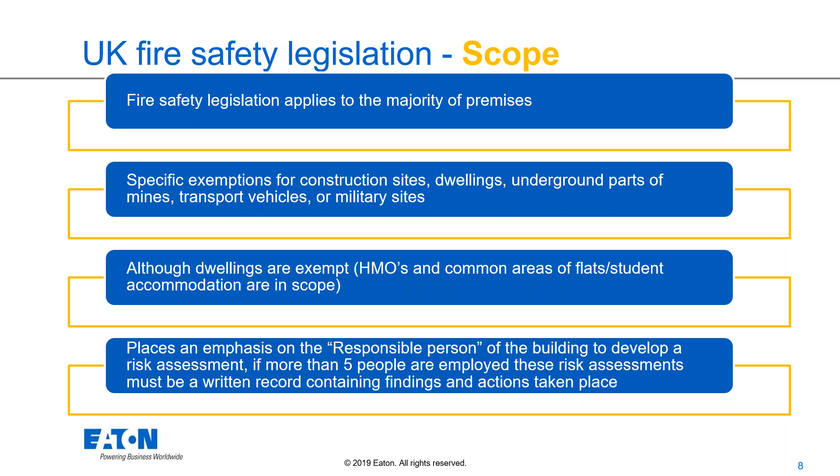To carry out those risk assessments - again, duty holder in Scotland and appropriate person in Northern Ireland - they're normally the employer or the building owner, but in some circumstances there can be more than one person who has an influence over the fire safety of a premises. That's particularly relevant in sort of lend-lease applications where you may have more than one responsible person. And again, there's a need to carry out a fire risk assessment, produce policy, develop procedures, and produce staff training and fire drills, provide safe means of escape, escape signage and sufficient emergency lighting, and they can use competent engineers to provide that service if required.

Now, a competent person - so if not trained themselves, the responsible person for that building must appoint or contract a competent person on their behalf to carry out a risk assessment. Now, just in terms of some of the breaches, and just to give you an idea of really what happens when it all goes wrong in the UK.

So these are fines and prison sentences for breaches of the regulatory reform order. Now, these specific examples do mention the lack of emergency lighting. There are many more examples on Google which may or may not include emergency lighting breaches. But to give you an idea, the fines are now unlimited.

There previously was a limit. In 2010, there was a £400,000 fine for a prominent fashion retailer, and you'll be able to find them on Google. In 2013, student accommodation was fined £150,000.

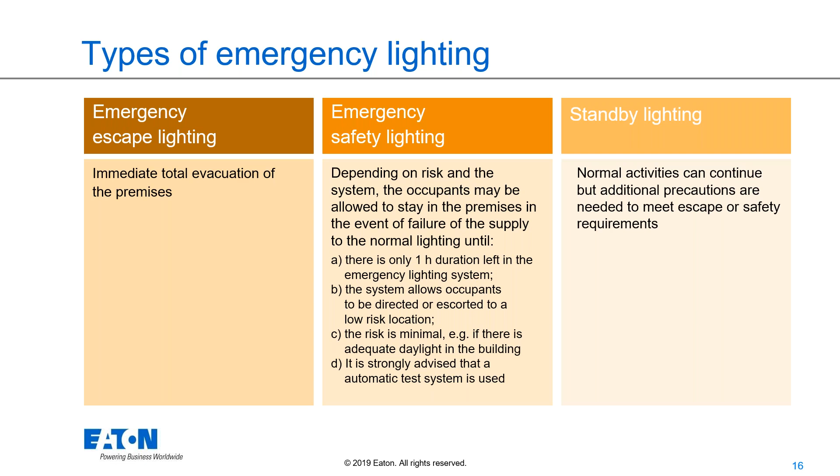Now, the last column on the right-hand side, that's standby lighting. I don't touch too much on it in the CPD because it tends to cover things like essential and non-essential supplies and multiple levels of redundancy. Think of something like a hospital where you provide lighting where normal activities can continue, but indeed maybe additional precautions are needed to meet escape and safety requirements. So I don't tend to cover that too much.

So if you are familiar with the previous version of BS 5266-1, which was in 2011, some of the main revisions are endorsing a change to a single exit sign format, which we'll pick up later. The scope now includes safety lighting, which we've just talked around.

There used to be a deviation within the UK that allowed a very low light level of 0.2 lux upon escape routes if you could prove that escape route was permanently unobstructed. That has now been removed, and minimum levels should be 1 lux at all times, but we'll touch upon that in a moment. There's some recommendations for specific risk applications, a clause around external emergency lighting, and some clauses around existing installations which may not comply with current standards and how to potentially rectify that.

So 5266 provides a diagram to assist designers, and I like to start off on this page as it just gives a nice overview which we'll build upon. This diagram shows areas which require emergency lighting.

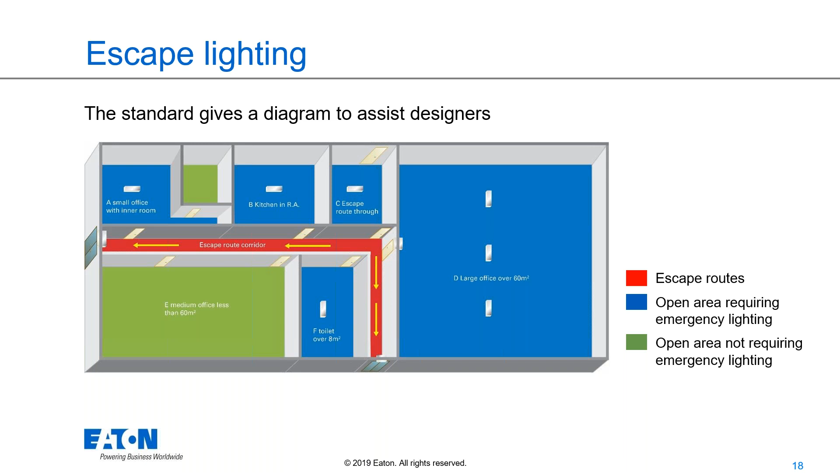Blue areas are open areas, also known as anti-panic areas, where a 0.5 lux emergency lighting level is required, which is any spaces over 60 meters squared, any toilets over 8 meters squared, or any areas identified as having an escape route passing through them, or identified in the risk assessment. Any red areas on that diagram is the escape route corridor that requires 1 lux minimum, and any areas in green potentially may not require emergency lighting. So spaces under 60 meters squared which are not a toilet, and generally there's no perceptible risk within those areas, so they're not identified within the risk assessment.

Based on that diagram, we'll now build that knowledge up around emergency illumination and application requirements. As I mentioned earlier, open area or anti-panic lighting is provided to avoid panic and provide illumination, allowing people to reach an escape route. That's generally identified as a space above 60 meters squared, or if an escape route passes through it, and any toilets above 8 meters squared, or any toilet for ambulant use, or identified by a risk assessment. The requirements are 0.5 lux, with a 0.5 meter outer boundary excluded, and a diversity ratio of 40:1, which is a maximum minimum ratio.

So if you hit 0.5 lux as a minimum, your maximum illumination in that room should be 20 lux, and that allows people to escape without the eye essentially responding to a high peak and a very low minimum.

Each compartment requires 2 sources of illumination, and a compartment is any open area or escape route requiring emergency lighting. There is a note that glazing panels in doors that allow suitable illumination from an adjacent location may be acceptable to form part of that 2 sources of illumination.

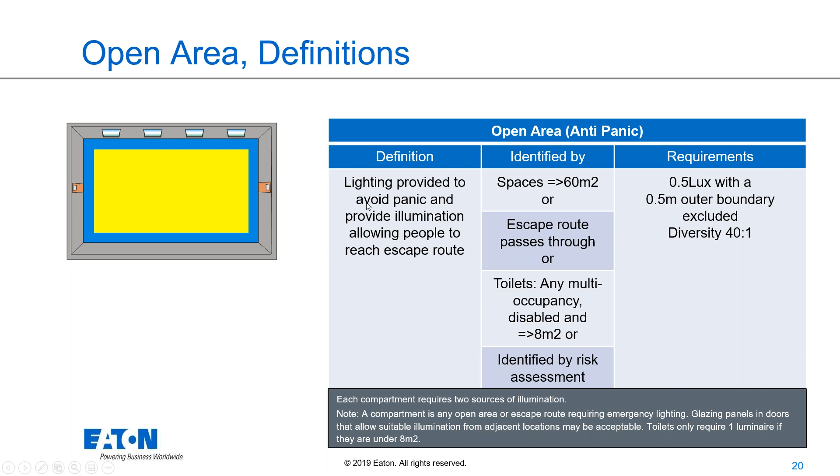So I like to touch upon spacing tables. I think spacing tables are great because they provide a very quick and easy method to identify how many emergency luminaires you need within a space, and the majority of products have spacing tables available.

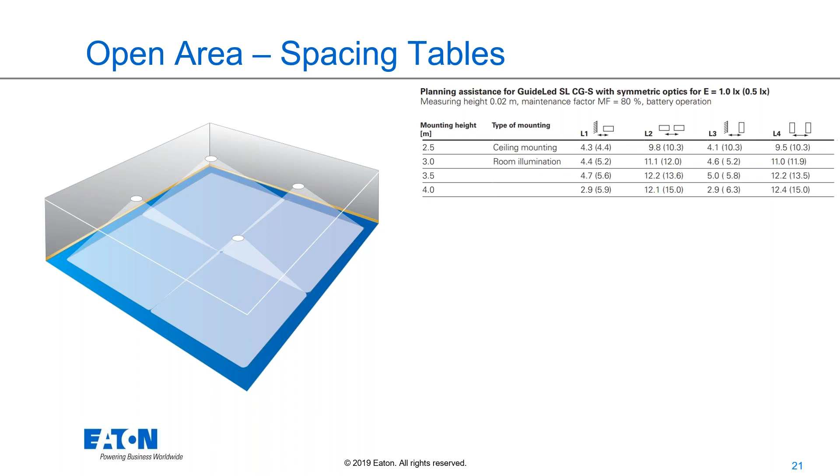So this is one of our products, a GuideLed SL, but essentially you select the correct optic. In this particular instance, it's a symmetric optic, which means it's symmetrical in both directions, and you select the illuminance that you require. For open areas, you require 0.5 lux. Then you read the mounting height. In this particular example, I believe I've chosen 3 meters as a mounting height.

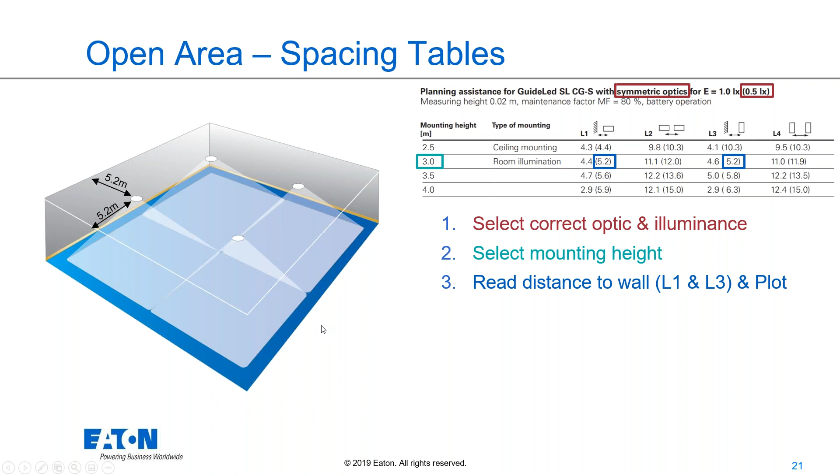And then you read the distance to the wall, which is L1 and L3. They're in brackets because of that 0.5 lux, and you plot that on a drawing, 5.2 meters from the wall to the first fitting, and then you read the distance between the luminaires, which is 12 meters, just shy of 12 meters, 11.9, and you can plot that on a drawing.

Now you can plot that up for any sort of square area. You're able to immediately calculate the amount of luminaires in the room and plot that on the drawing, and then quantify how many emergency luminaires you require for that 0.5 lux in that open area. So I do believe they're quite powerful tools, and you can repeat the spacing until the area is complete.

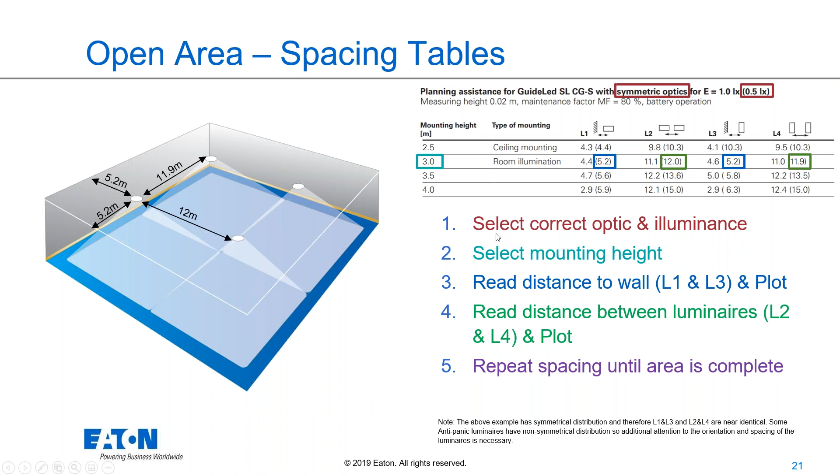Just a small note on that: that has symmetrical distribution, so the figures are very similar between the two directions of the luminaire. If you have a luminaire at 0 degrees or 90 degrees, it's very similar. Just be aware if you have asymmetric distributions, you might have a linear product — they may be different in different directions.

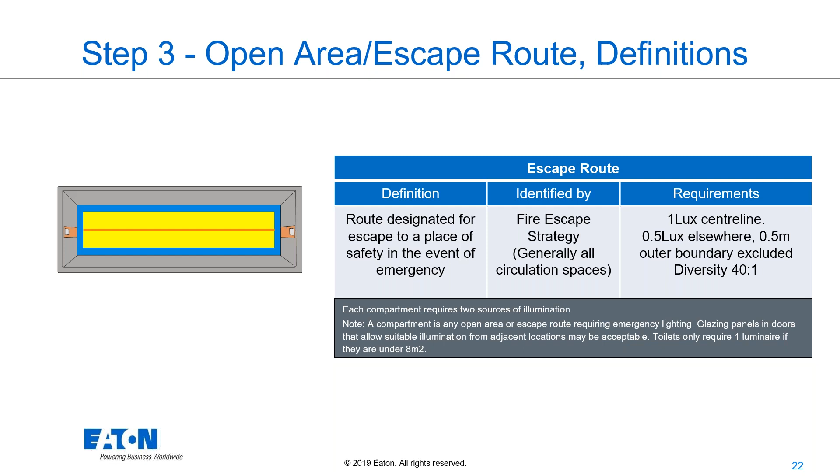So we'll have a look at open areas. Escape route definition: an escape route is a route designated for escape to a place of safety in the event of emergency. It's generally identified by the fire escape strategy, but generally all circulation spaces are escape routes. The requirements are 1 lux down the center line and 0.5 lux elsewhere over that escape route, with a 0.5 outer boundary excluded. Again, diversity ratio applies, and again the two sources of illumination requirement applies.

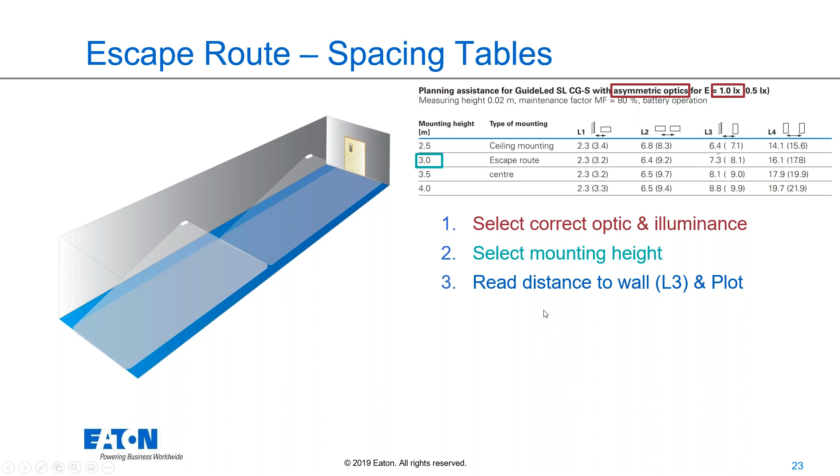And again, a very similar story in terms of escape route spacing tables. You select an asymmetric product, which provides 1 lux down an escape route, and you do the same again: select the mounting height, read the distance to the wall — 7.3 from the wall to the first fitting — and then read the distance between the luminaires, 16.1.

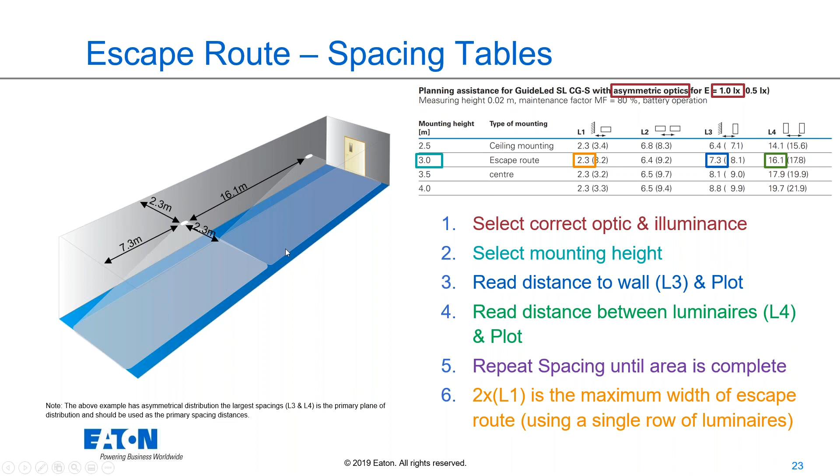Repeat the spacing until the corridor is complete. Two times the L1 distance, which is the distance from the luminaire to the wall in the other direction, is the maximum width of the escape route. So these are very useful spacing tables for calculating open and escape route spacing and allowing you to plot emergency luminaires.

That's the requirements for open areas and escape routes. Now, 5266 calls for luminaires specifically sited at locations, which will be on the following slides. For these examples, near is defined as within 2 meters horizontally, and at means that the emergency luminaire would illuminate in both directions. I'll explain that as I run through the slides.

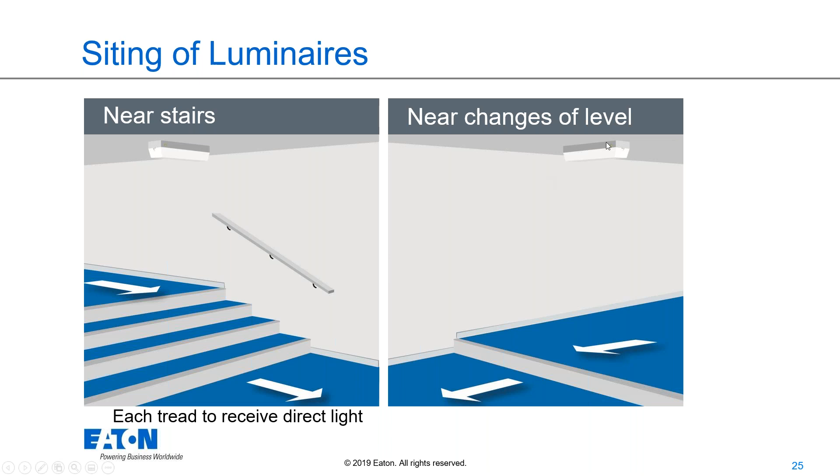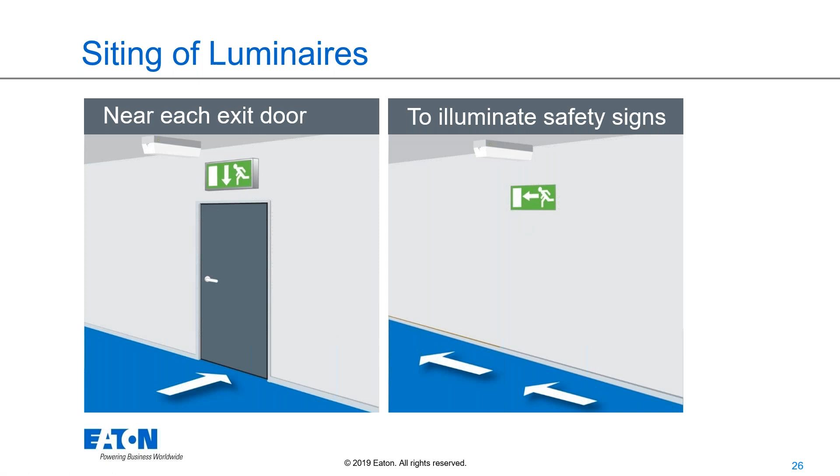Each tread should receive direct light, and illumination requirements should be met: 1 lux as an escape route, 0.5 lux for open areas. Same for near changes of level - an emergency luminaire must be placed near, again within 2 meters horizontally. Near to each exit door intended to be used as an emergency, so again within 2 meters, to illuminate any safety signage, and we will touch upon safety signage towards the back end of this CPD.

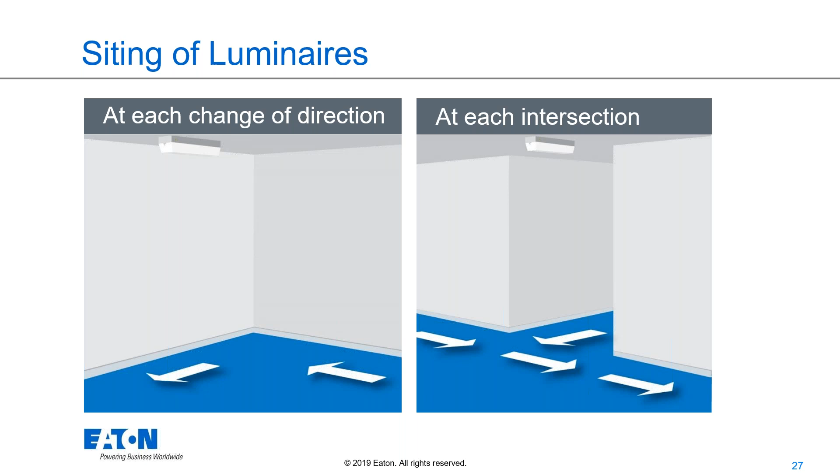At each change of direction - so 'at' means that the emergency luminaire illuminates in both directions. If it is on a corner as shown, it does need to illuminate in both directions, and at each intersection.

Near to first aid posts, so again 2 meters horizontally, but 5 lux vertical illuminance is required on that first aid post. This allows people to be able to identify that first aid post and, for example, identify the contents of that first aid post in a power loss situation, which is why there's an enhanced level of 5 lux. Now, there is a requirement there.

You see what's known as a European norm, EN 1838, which is a European norm for emergency lighting, and it is adopted by the UK as a BSEN. So that requirement, even though it is under EN 1838, still applies.

Near to firefighting equipment and call points, again a very similar situation. If that piece of firefighting equipment needs to be used in an emergency in a power loss event, the 5 lux allows people to read the label, identify what type of fire extinguisher it is, water or foam for example, and to use it on the appropriate fire and operate it correctly. Very similar for call points, allows people to identify. So that enhanced requirement comes in of 5 lux.

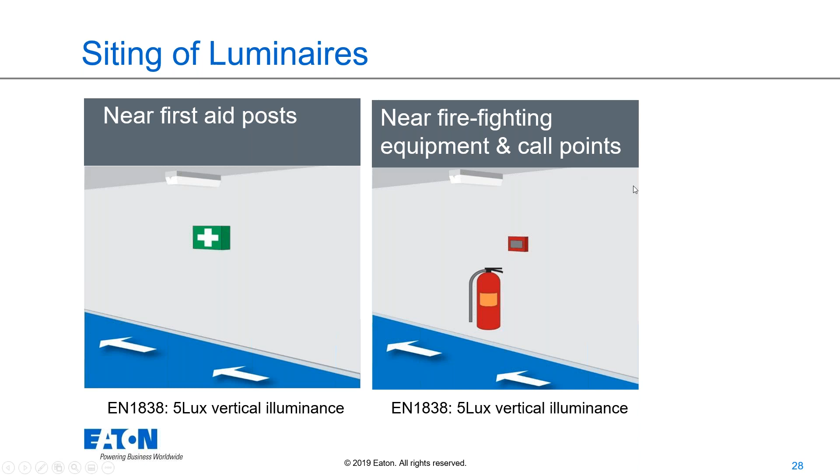And again, you mentioned around 2 luminaires per compartment, which we've previously discussed. So, siting of luminaires - I think it's worth talking around this. In the 2011 version of the regs, it used to be acceptable to just place an emergency luminaire near to each final exit. Typically you would allow an emergency bulkhead, for example, over the final exit door into your external space to illuminate in an emergency.

The requirement now is that you continue the escape route outside of the building until a sufficient place of safety. In lieu of other information, I typically see that as the fire muster points, for example, outside the building. So emergency lighting should now continue external to the building.

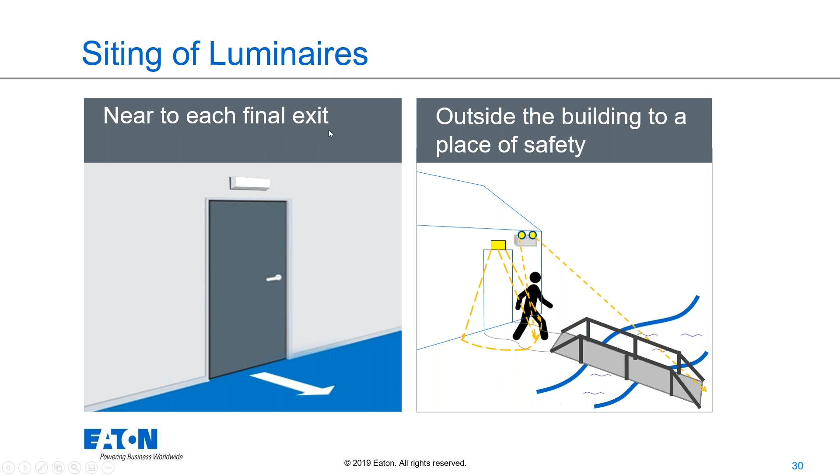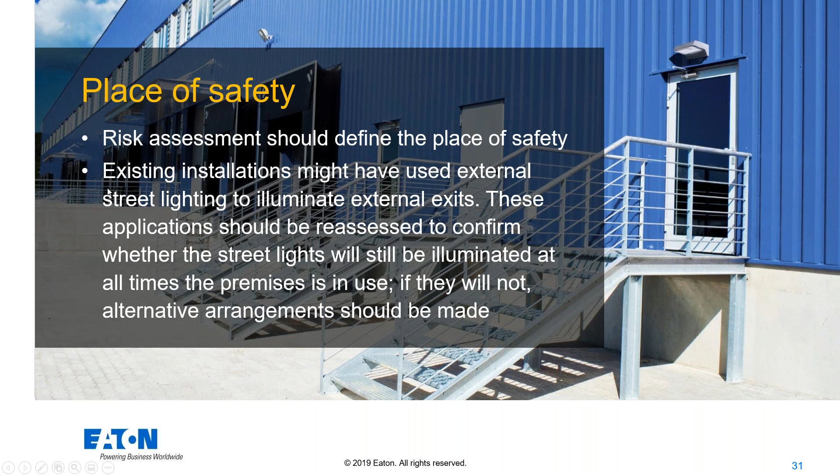As said, a risk assessment should define that place of safety, and existing installations might have used external street lighting to illuminate external exits. Really, this should be reassessed to confirm that the street lighting will be illuminated at all times the premises is in use. Otherwise, you need to bring that requirement back up into scope and allow sufficient emergency lighting externally. And again, that is existing installations only - that cannot be used on new installations.

So they're the specific positions where emergency luminaires need to be placed. There is some specific locations which require typically enhanced levels of emergency lighting. Now these are detailed under Annex E of 5266-1. Some defined locations may be identified and need an enhanced emergency lighting.

They're not to be confused with high risk areas, which are generally identified by the end client using a risk assessment, or should I say the responsible person for that building. A high risk requirement may be, for example, a laboratory, which requires 10% of the general lighting. So these are specific locations and not high risk locations.

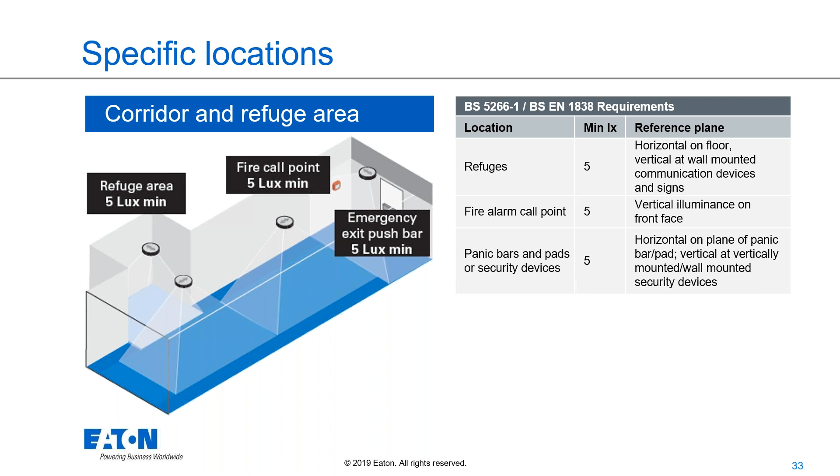Okay, so we'll run through some of these. A disabled refuge area requires 5 lux both horizontally on the floor and at any communication devices and signs on the wall. Fire alarm call points we've touched upon, 5 lux. If there are any panic bars or security devices on internal doors or final exit doors, 5 lux should be provided on those devices, such as a break glass or push bar.

Plant rooms, switch rooms and winding facilities for lifts require 15 lux in the plane of the visual task. The plane of the visual task is really a catch-all for anywhere maintenance personnel may be required to perform a task under a power loss event. For example, they may have to wind a lift using a manual winding facility. So 15 lux would be required in that location.

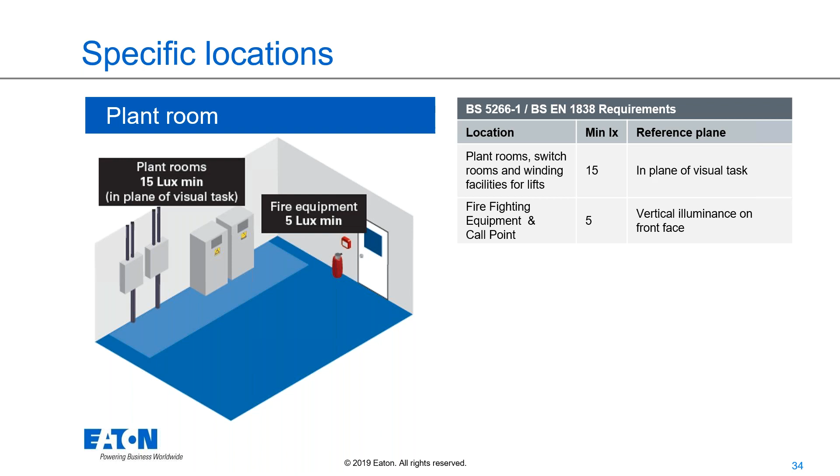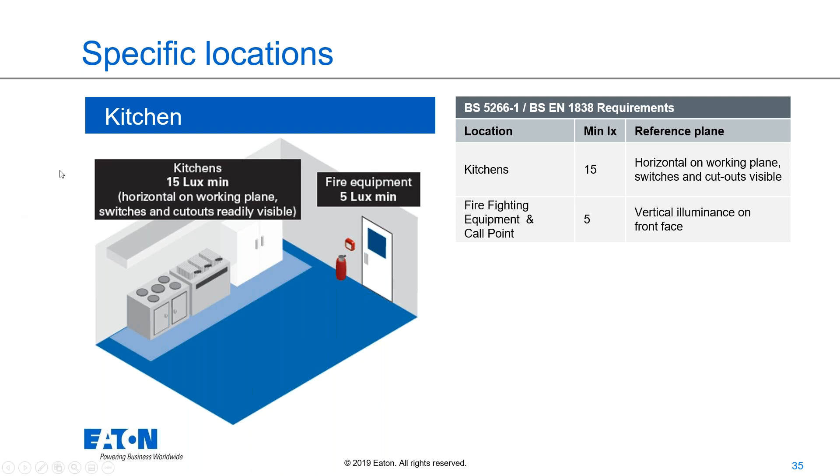5 lux we've mentioned on the firefighting equipment and call point. Kitchens require 15 lux horizontally on the working plane and on any switches and cutouts such as gas isolation or electrical isolation points, and again the fire equipment. Reception areas need 15 lux on any fire alarm panels and repeater panels, and generally any maps located, such as zone maps adjacent to the panels. That allows the fire authority to read the panel and any zone maps and identify the area of fire. And finally, 15 lux on the reception desk and the telephone/switchboard.

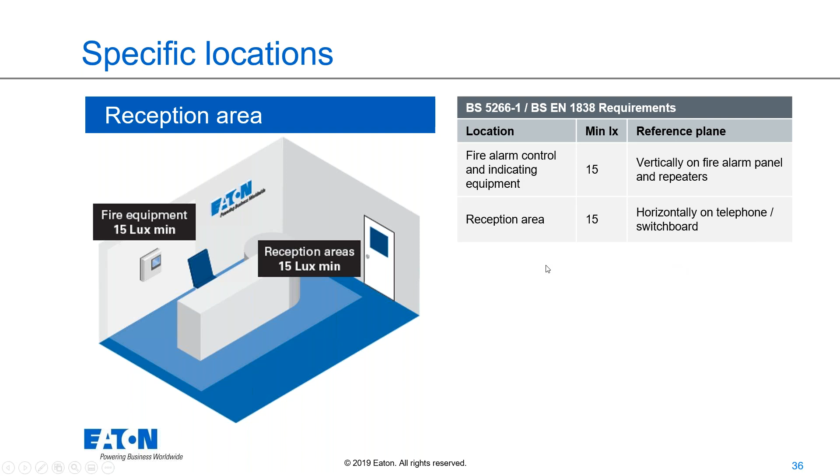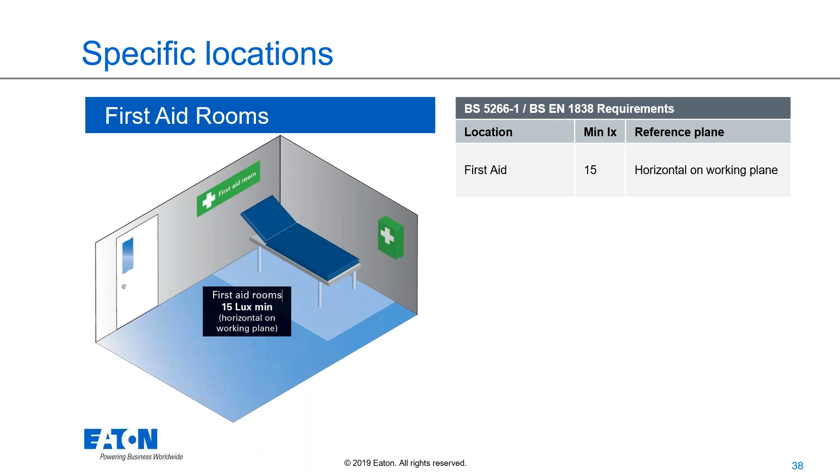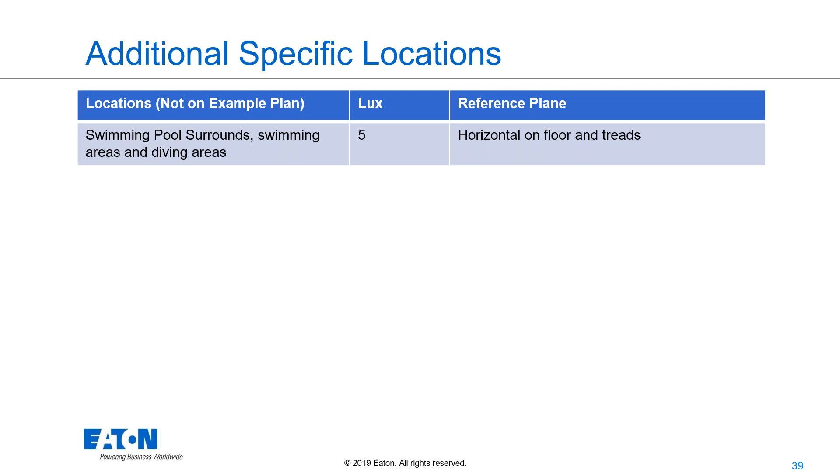Treatment rooms require 50 lux horizontally on the working plane. First aid rooms require 15 lux horizontally on the working plane, with the general perception that first aid rooms are unlikely to have obtrusive procedures going on. Unfortunately, I don't have an image for this, but swimming pools, surrounds, swimming areas and diving areas require 5 lux horizontally on the floor and any treads, such as steps up to a diving area, for example.

Okay, we'll have a look at exit signs now and run through the requirements for exit signs and the types of exit signs available on the market. I didn't know if Jamie said at the start of the presentation, but if you have any questions, please feel free to put them in the chat, and we'll try and pick them up at the end of the CPD.

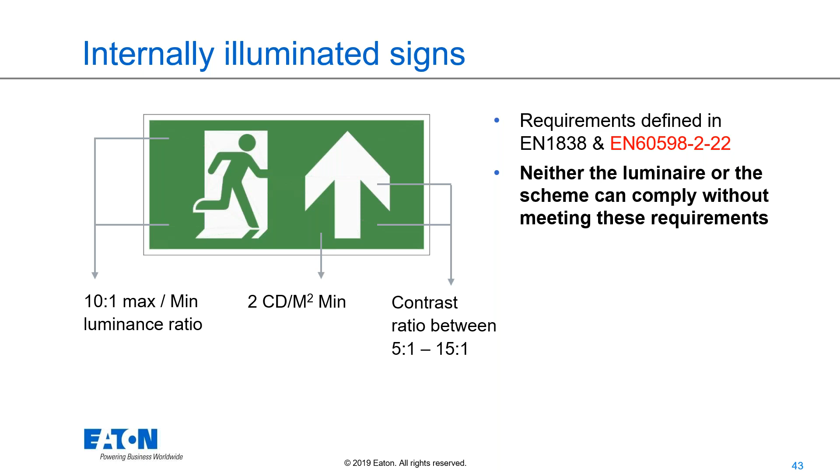Okay, otherwise externally illuminated signs. If a sign is illuminated by an external source, the vertical illuminance should be not less than 100 lux under normal lighting conditions, and should provide not less than 5 lux on any part of the sign under mains failure conditions. That vertical illuminance should be proven by a suitable calculation.

In other words, if you use a sign which does not have its own dedicated light source, you need to put a bulkhead or an emergency fitting within 2 meters of it, and you need to prove via calculation that you're getting 100 lux on the front of the sign under general conditions and 5 lux under emergency conditions. I recommend, because of that arduous nature, that you just purchase internally illuminated signs.

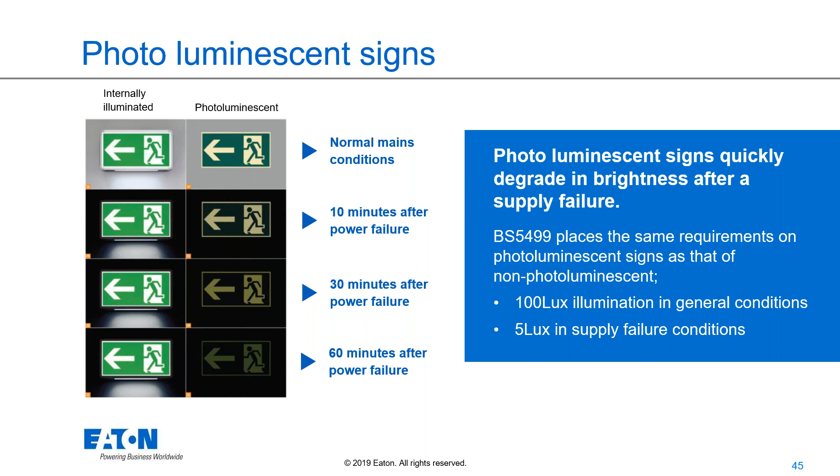Just a word of warning around photoluminescent signs, because we did see this a couple of years back, sort of glow in the dark signs. The requirement on them is exactly the same. You still need to provide 100 lux in general conditions and 5 lux in emergency supply failure. You still need to put a bulkhead next to it within 2 meters to provide that level, and you still need to prove that via calculation.

Now, one of the benefits, other than not having to run all of those calculations, is if you have an internally illuminated sign, the viewing distance is actually 200 times the height of the sign. Whereas if you use an externally illuminated sign, you times the height of the sign by 100 to give the viewing distance. Most sign manufacturers will just provide the viewing distance in meters rather than that calculation. So because if you have an internally illuminated sign, you can double the viewing distance for the same size sign, and you can use half of them essentially.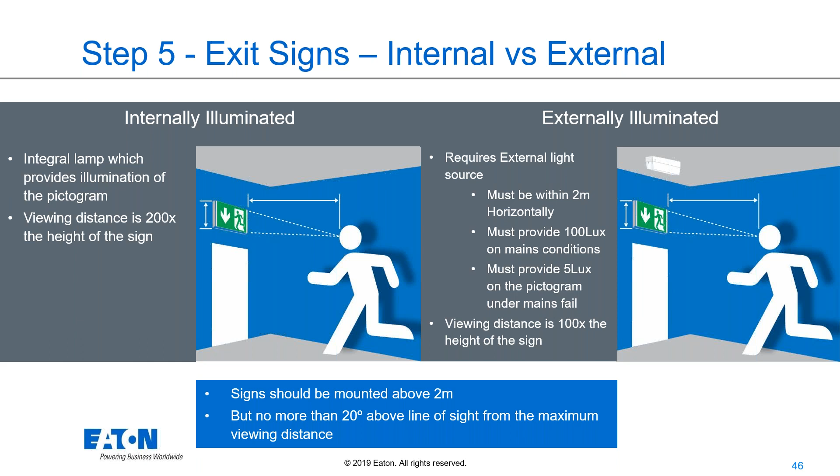Now, signs should be mounted above 2 meters, but no more than 20 degrees above line of sight from the maximum viewing distance. It's a little trigonometry calculation, and essentially what that means is, I think from memory, the last time I did it, a 20-meter sign could be at about 7.2 meters high. In warehouses and large heights where you can't mount signs at 2, 2.5, or 3 meters, you need to put a larger and larger sign up if you're mounting it higher.

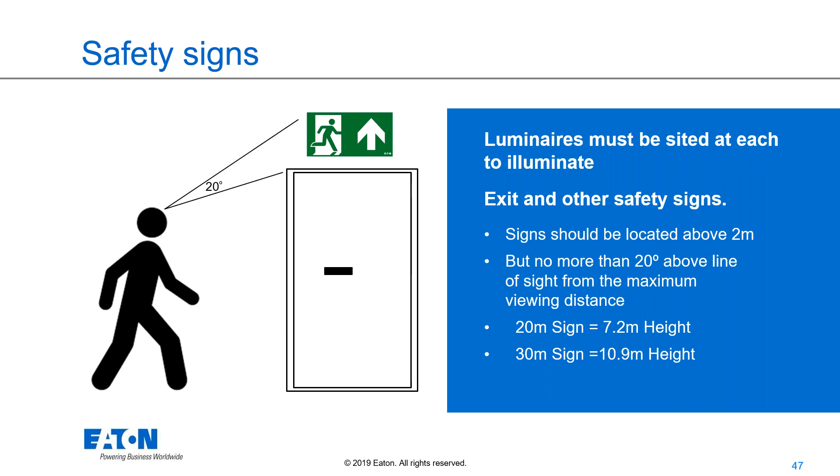I actually have this on here: a 20-meter sign can be at 7.2 meters height, and a 30-meter sign can be at 10.9 meters height. So if you had to go higher than that for whatever reason, you'd need a special sign with a larger viewing distance to be able to mount it higher.

So a little note on twin spot projector units. I must admit they're not as popular as they used to be. They produce a beam of light and not a flood. They're generally suitable for escape route coverage and not open area coverage.

I have done schemes trying to light an open area with twin spots as the known beam lights. You have to be very specific in the angles to actually produce a meaningful result, and then they get installed, but they're not on any sort of locking mechanism. So it's very difficult to actually achieve that illumination level and requirement and compliance.

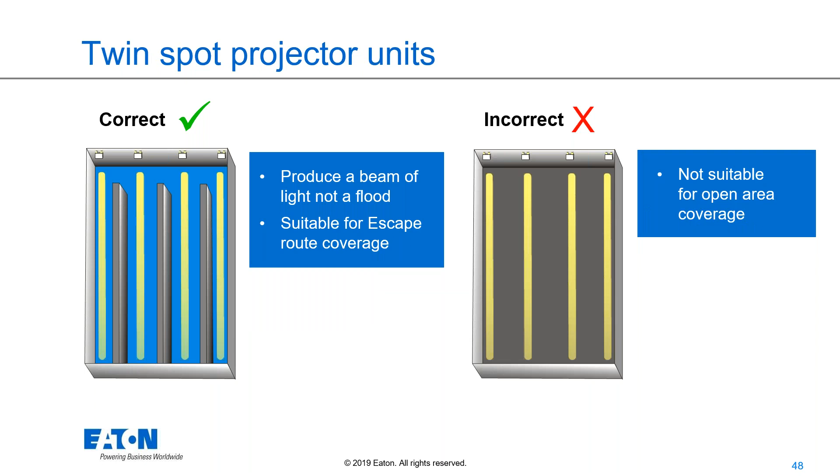What I will say is they are quite useful nowadays for covering high risk areas. So quite useful to point the illumination source directly on a high risk location, such as, for example, a laboratory area or an acid bath or something like that.

Now, I touched upon diversity requirements of 40:1, which is a maximum to minimum ratio. And I think at the time I said 20 lux under the fitting and 0.5 lux as a minimum would just be hitting that ratio.

Now, it is a common issue with central power supply conversions. That's where you're converting the mains luminaire to a central power supply or central battery unit, as they're often known, generally in combination with low mounting heights. So where you often see issues is in car parks, for example, where an anti-corrosive fitting is converted, and you'll generally see issues with diversity.

LED bulkheads, which are designed for emergency lighting, will generally only hit 2 to 5 lux under the fitting, so they'll be well within that requirement if it's specifically designed for emergency. Keep an eye out generally when it's central power supplies and mains luminaires that you convert in. That tends to be where it becomes a problem, and you have to add more and more luminaires to bring your minimum up to a more reasonable level to meet your ratio.

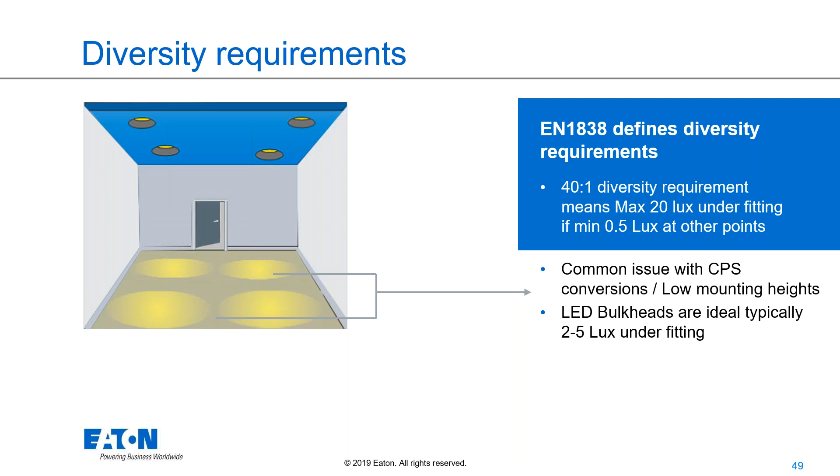Okay, we'll quickly touch upon product authentication.

So the government RRO, Regulatory Reform Order, which I mentioned at the start of this CPD, strongly recommends the use of kite-marked products, which is proof of component quality, proof of all performance claims such as light output, independent test of distribution and IP rating, and proof of safety and reliability and consistent quality.

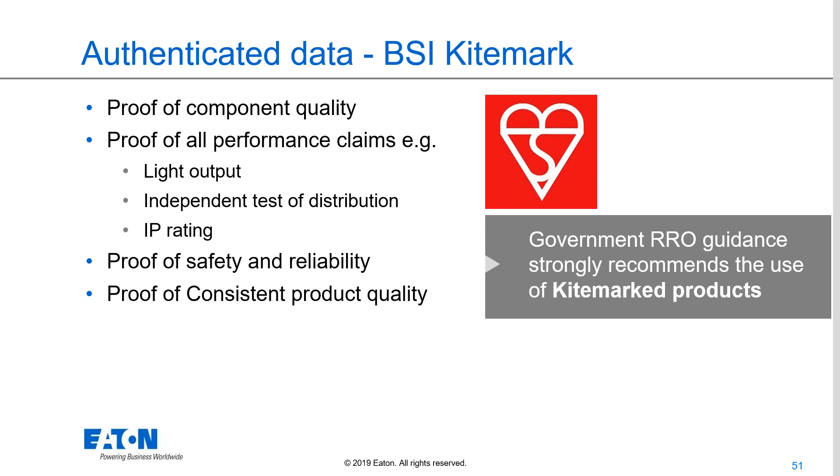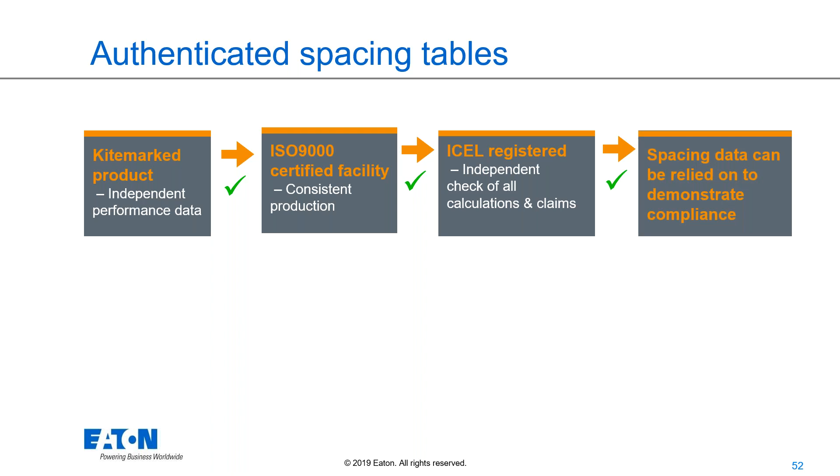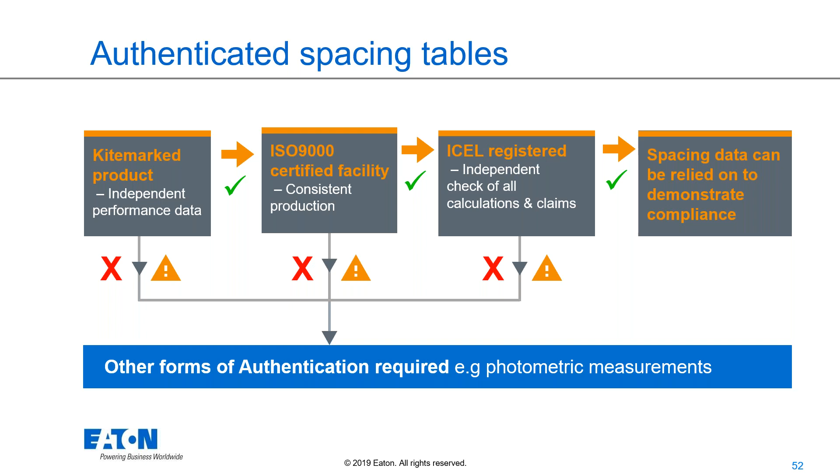Now, if you have a kite-marked product and you have an ISO 9000 certified facility as a manufacturer, you can have your spacing data checked, and essentially you can use spacing data to provide your emergency scheme. Otherwise, you need to do photometric measurements and use a calculation platform. So just check that the spacing data is authenticated, and then you can use that spacing data.

So that's an example there. And again, like I say, I do recommend the use of spacing data. I think they're very useful for providing a very quick and compliant design in most cases.

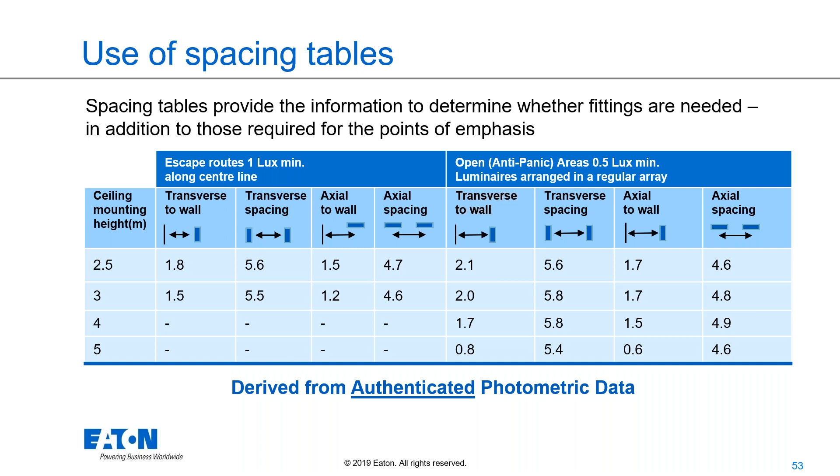One thing to be considerate of is derating factors. It's not as problematic now as it used to be. So I'll run through these: dirt anywhere from 5 to 20% depending on the environment. In particular clean environments, I'd suggest that's more towards the 5%, and 20% towards the dirtier environments.

Aging of the lamp now depends on the light source. LEDs have a higher life, and they don't reduce their output as much with age. It also depends if you're permanently running that lamp or if you have a non-maintained system. I mentioned earlier about exit signs being permanently illuminated. Typically now, emergency lighting is non-maintained, so you don't illuminate the lamp under normal conditions, you only illuminate it under emergency. So there is no such derating of the lamp in terms of output because you aren't running the lamp.

So it can be close to 1% or 0% if you are only running that lamp under test and under an emergency condition. One to be wary of: end of discharge of the battery. Most manufacturers will quote end of discharge of the battery, or what's known as emergency ballast lumen factor, or EBLF. If you see ballast lumen factor, or BLF, that is at the start of the discharge of the battery. So you've got to be really wary of that. EBLF is emergency, and it is at the end of the discharge of the battery.

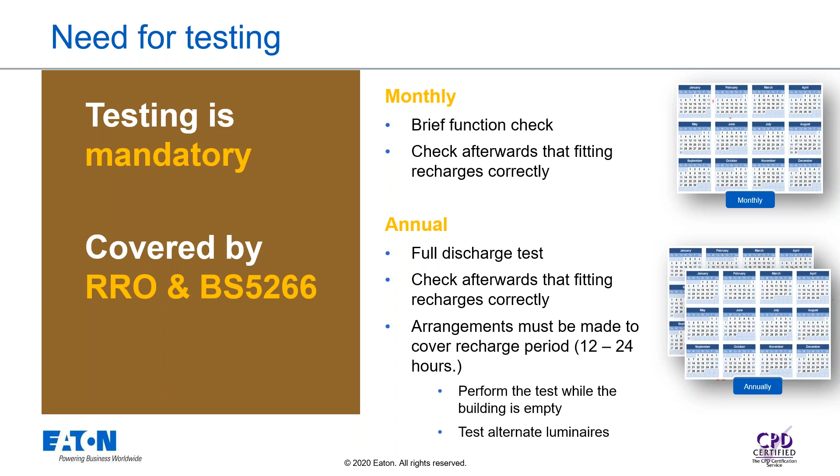So generally, there's different testing options. The first one is manual test, standalone self-test, self-test with some form of central reporting, and again central reporting and notification - very similar those last two, but we'll run through them.

Now, to test that product requires reliance on the user to remember to test, to inspect at the start to ensure that the charge indicator is working, inspect at the end of the test to ensure that the lamp has illuminated for the full duration, check for correct recharge so that the charge indicator re-illuminates, and relies on the user to record the results and ensure continuity between multiple different tests.

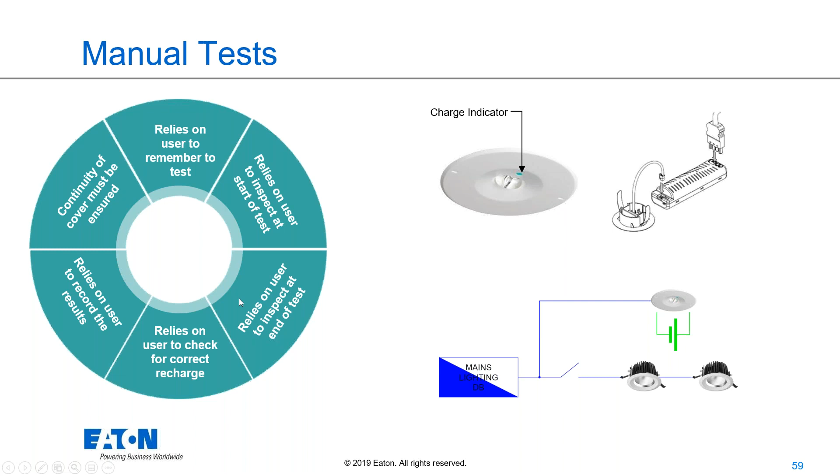Typically that's achieved via the use of a key switch and manual interaction with the product. Now, self-test employs a little bit of intelligence within the luminaire, so that luminaire can actually test itself by breaking its own power supply, essentially.

And typically the charge indicator would employ either a bicolor LED, so it might flash red or amber, or indeed it might flash or buzz to indicate that there's a failure if identified. And typically those failures are identified by different flashes - so if a battery fails, it might flash red, if the LED has failed, it might flash green, for example.

Now that takes some reliance away from the user to remember to test and then inspect at the start of the test, and generally ensures continuity, because you can usually set the tests apart on adjacent fittings, for example, 24 hours or 12 hours apart.

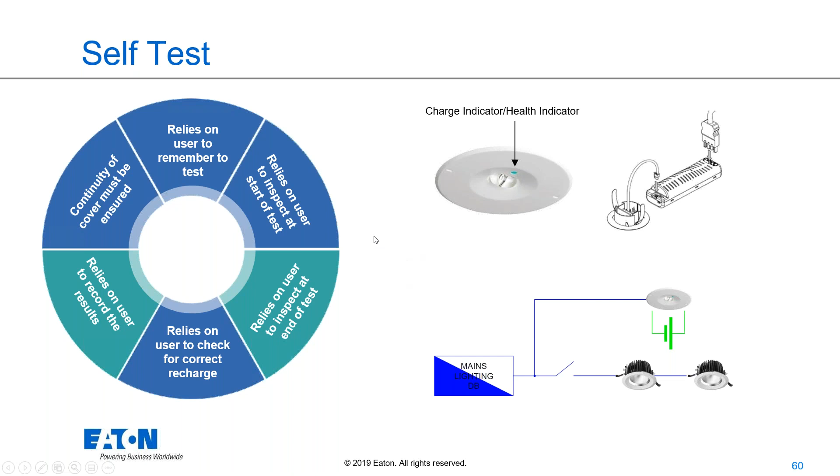And it takes the reliance away from the user to check for correct recharge. However, the user still needs to inspect the products once a month and record the results.

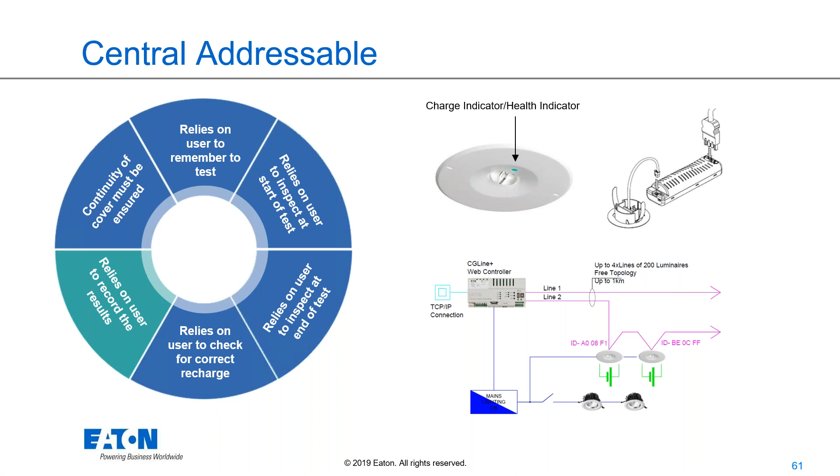And then the step up from that is a central addressable system, and essentially you run a data pair around all of your products which have that self-testing functionality generally, and the reliance to actually inspect the product is done via the controller, and then with some form of visualization, the user no longer needs to record the results. It emails or it is visible on a BMS system, whatever it may be. But essentially that logbook is held within software and visualized for the end user.

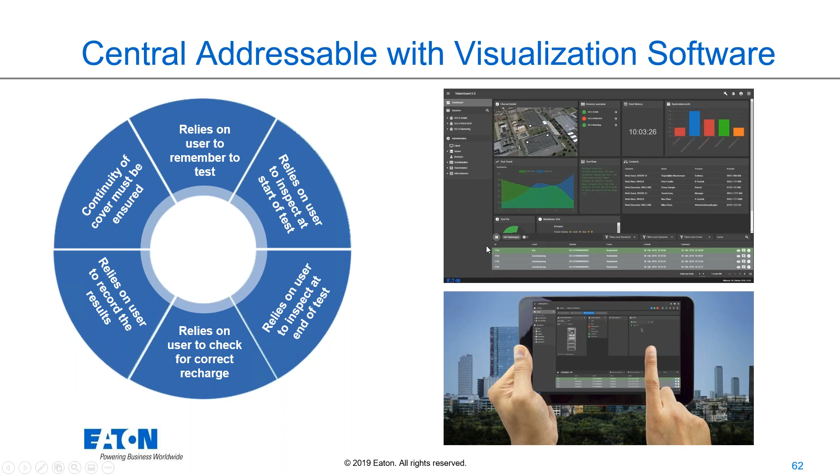So those are the sort of test systems as you step up through the different requirements. Now, the last section is only a short section, so we are probably going to be a little bit ahead of time here, so I would say we'll leave some time for some questions. But wiring requirements.

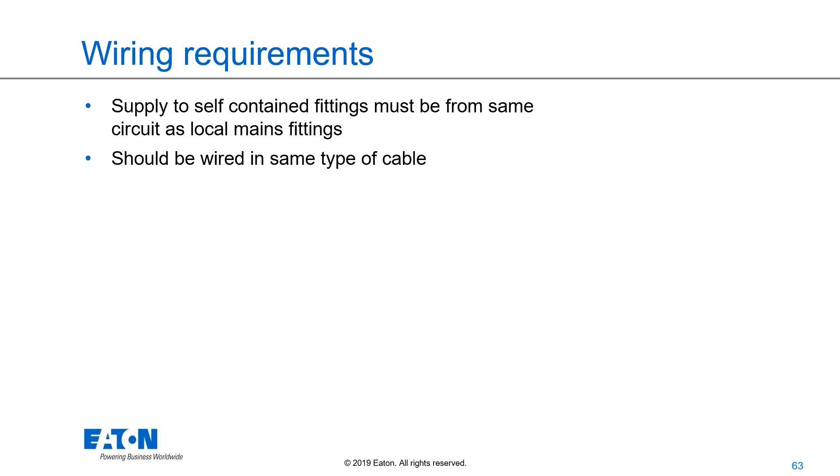In that area. Now, maintained wiring, where all of the products are maintained and permanently illuminated, can be wired from their own separate source because they are permanently illuminated. But that's not really deemed appropriate nowadays, apart from exit signs, because of the power loss. So maintained fittings are permanently on, so they can be wired on a separate circuit.

So just a little bit of further reading. There is some information on gov.uk, and some requirements under Part B, which are quite useful to read through, but they generally point towards BS 5266. We have an Eaton website, LifeSafe UK, and also Safe Evacuation UK. And there is some information at the Lighting Industry Association page, ICEL.

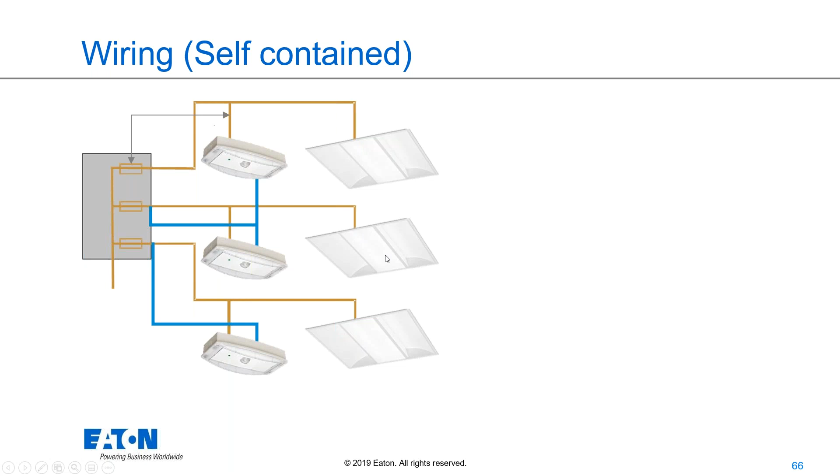I believe it does, and apologies if I'm wrong, but I think I get the ethos. I showed on the last page the wiring - let me go back to it - showing the emergency luminaires fed from the same source as the general lighting. The general lighting circuit is here, and the emergency essentially taps off before any switches to power the emergency fitting. I think what Sam was getting at is: if he has a very large area with multiple general lighting circuits, could he potentially use what's known as a phase monitor device?

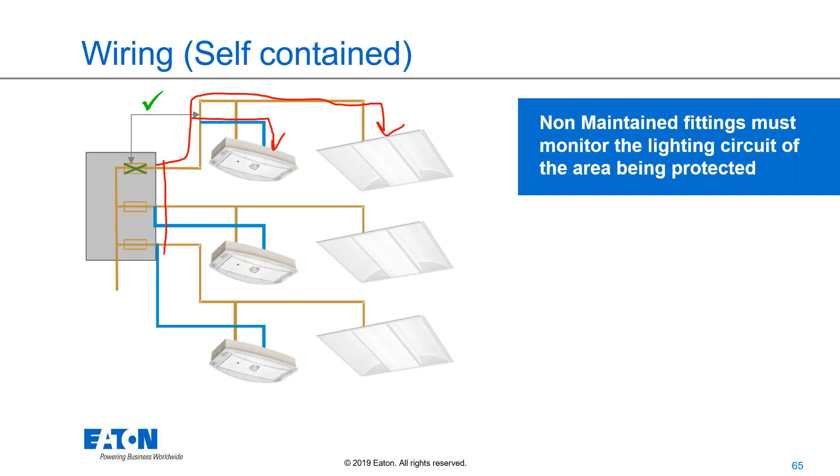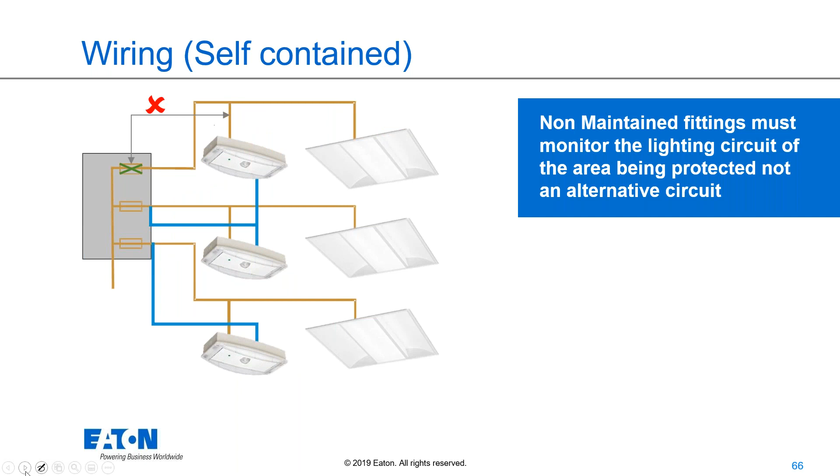So it monitors multiple general lighting circuits and essentially activates the emergency if any one of those circuits fails. Now we do that in central battery applications very, very regularly. I don't know whether it would be permissible. My instant thought is yes, but the problem is you are discharging the batteries for the whole installation. In that scenario, if one general lighting circuit fails, it's a really good question.

I think what I would prefer to see is a level of redundancy where, rather than forcing the permanent supply to the emergency to fail, you actually brought on a switch supply to switch the emergencies on as a first instance, rather than breaking power. In that scenario, I would suggest it would be permissible.

A couple more questions to go then. Got one from Mark. Interesting one: I was told Eaton are discontinuing production of emergency lighting products. Is this incorrect or correct?

That's certainly incorrect. Unfortunately, a couple of years ago we did have to close down the general lighting plant, so we don't offer general lighting anymore. That maybe has something to do with it, maybe some crossed wires there. No, emergency lighting is still going strong. We've got plants in multiple locations. There's one in Doncaster, where I'm generally based, which manufactures static inverters, AC static inverters. We've got a plant over in Germany, an AC/DC plant, and some self-contained plants dotted about as well. So no is the answer in short, but yeah, unfortunately the mains lighting plant did close.